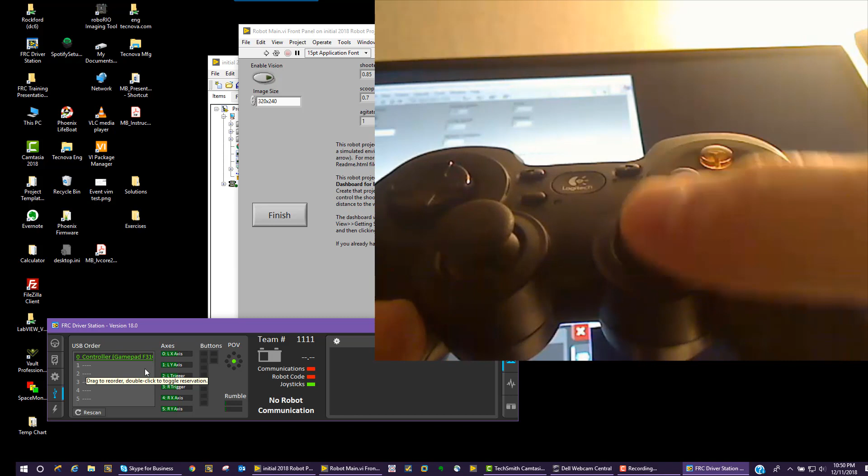And if we go over here to our USB tab, it says that I have one game controller in there, the Logitech F310, and we can move axes up and down, left and right, and we can push our buttons A, B, X, Y, our trigger buttons. We also have trigger axes, a right trigger and a left trigger.

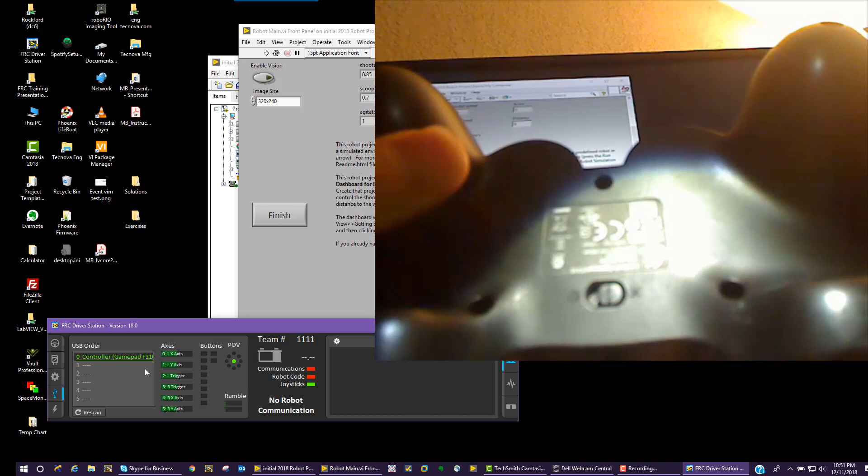One thing to note is there's a switch on the Logitech, and just make sure that I have it in the X position to get these same results. Not sure what the D position will do, but it doesn't work as well.

Another thing, the start and back buttons are also registered. And one button that a lot of people forget is that the joystick itself has a button - you can press down on the joystick, that's a button as well. The POV is this little dial here, up, down, left, right. You can also use that as a robot controller.

And the button right here is your start button or mode button, and if you push that, a little LED turns on, and what that does is swap the joystick here with the POV. Turn the mode back off, then the POV is back to this, and your joystick is back to controlling by that item.

Okay, so one thing to note is the numbers here, 0, 1, 2, 3, 4, 5. These are the indexes of the arrays when, in LabVIEW, you ask for all the axes using the joystick commands - you'll get an array, and if you want to know what axis each index is, it shows you here in the driver station.

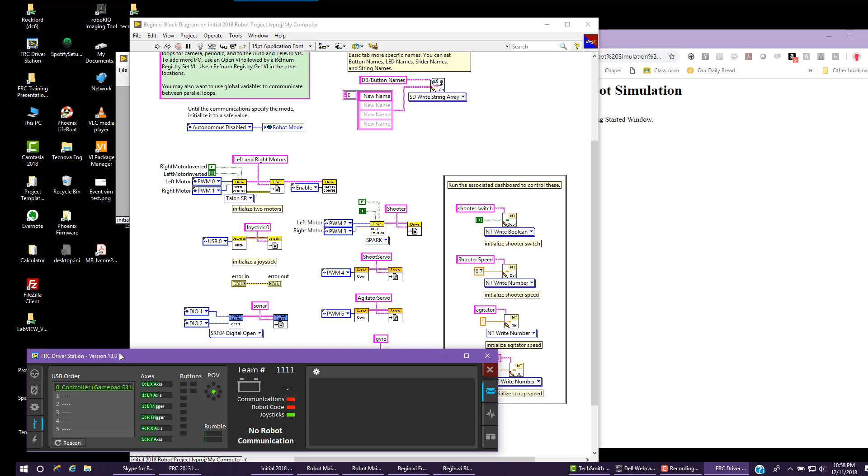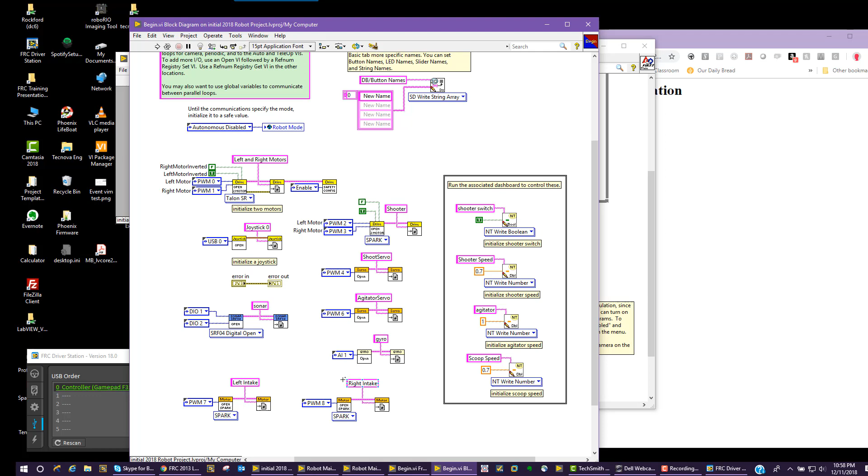So this is the begin where we're setting up our shooter, our servo, agitators, all our different mechanisms that are on this robot. We're going to look at teleop just to see what things they do in teleop. In teleop, we get the references using these VIs to read them.

This is where we get all our joystick values, and then this is the array of all our axes. If we want to get axis 0 and axis 1, when you use this index array, always - if you don't put values here, which you really should, but if you don't, it starts at 0, 1, 2, 3. So if we go to axis 0 and axis 1, axis 0 represents the X value in an arcade drive, and axis 1 represents the Y value.

If we go back to our FRC driver station, axis 0 will be controlling the X-axis of our arcade drive, and axis 1 will control the Y-axis of our arcade drive.

Similarly here, we are pulling out this Boolean array. These are all our buttons, and since we didn't wire this, this is going to be button 0. Button 0 will take the shooter servo, and when you press it, the shooter servo will go to 0, and when it's false, the shooter servo goes to 85 degrees. And that button, you can see here is the first button.

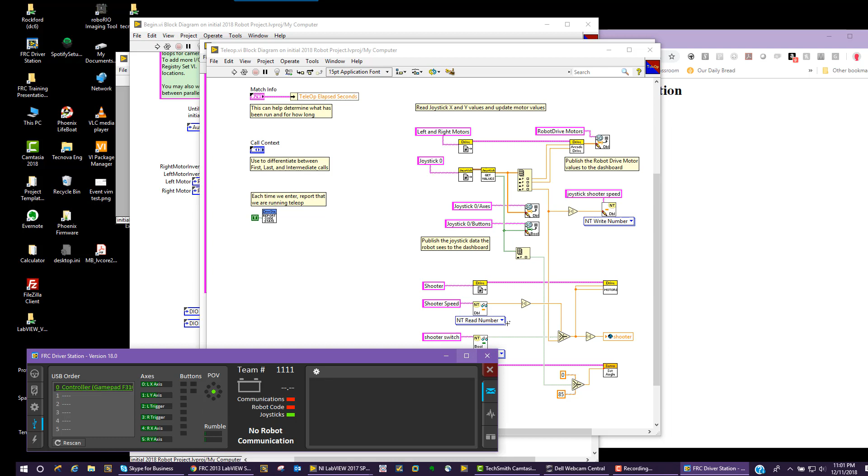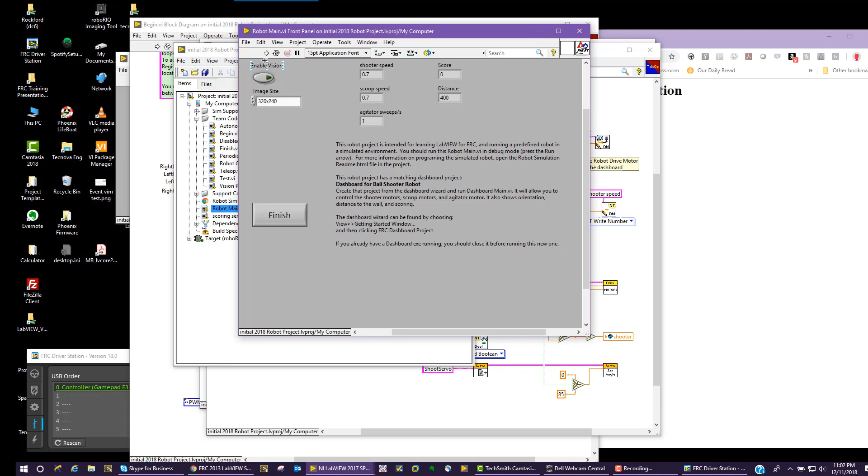Alright, so let's see if that works. We're going to go back to our main. I'm going to hit Control Shift E to go to the project, and I'm going to open Robot Main, and I'm going to run Robot Main. And there's my simulator, and I have to go to my driver station and enable my robot. And I'm going to drive it.

Set it right there, and I'm going to shoot a ball. Boom. Alright, now if I pull down the right trigger, see how far that shot? Pulling down the right trigger should speed up my ball shooter and shoot again. See if that doesn't shoot farther. Looks like it has a little more energy, maybe. Not too much farther.

So let's debug this. I'm going to come back to Teleop and put a probe here. You see, there's a probe, and as I pull my right trigger, nothing happens. On my left trigger, nothing happens. So let's put a probe here. Now if I pull my right trigger, I get change. Slide these over. So somewhere there's this shooter switch.

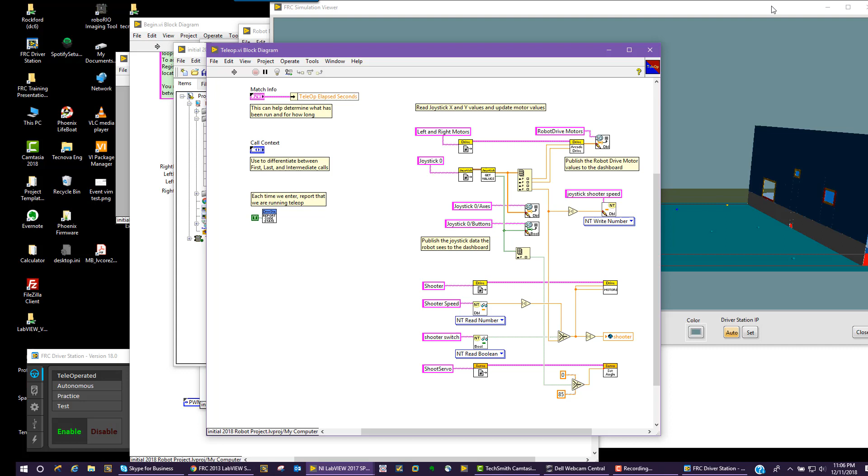So let's see how we can shut shooter switch off. I'm going to have to stop the program, and we're going to go back to robot main. Okay, we're going to continue looking here at Teleop, and bring our code in.

We saw that there's this network table that's looking at shooter switch. So I'm going to highlight shooter switch and copy it with Control C. Then I'm going to bring up my searcher with Control F, and paste it with Control V.

I'm going to tell LabVIEW I want to find all instances, but I'll go to more options here and tell it only block diagram and labels. I don't want it to look for this in the front panel — saves a little bit of time. And I'm going to click find.

I'm going to skip any VIs that are password protected. You'll see that LabVIEW found it 3 places where this shooter switch exists. So in order to toggle through all these, it tells me if I just hit Control G to go forward, or Control Shift G to go backwards. So I'm going to hit Control G.

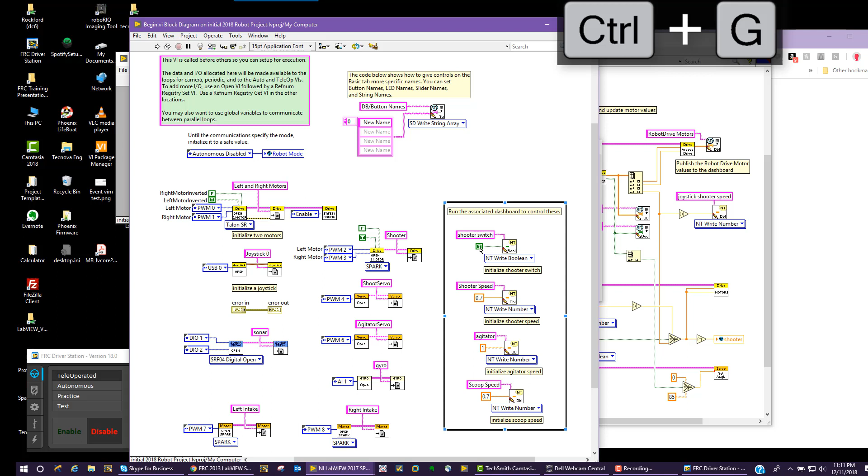You see it says shooter switch, but that's just a label. Right above it, I hit Control G again — this is where it's initialized and it is set to true. So if I set this to false, when I get to Teleop here, this value will be false, so it will use this value to set the shooter, which is my speed control, the right trigger. I'll hit Control G again just to make sure I found all of them and understand what shooter switch is used for.

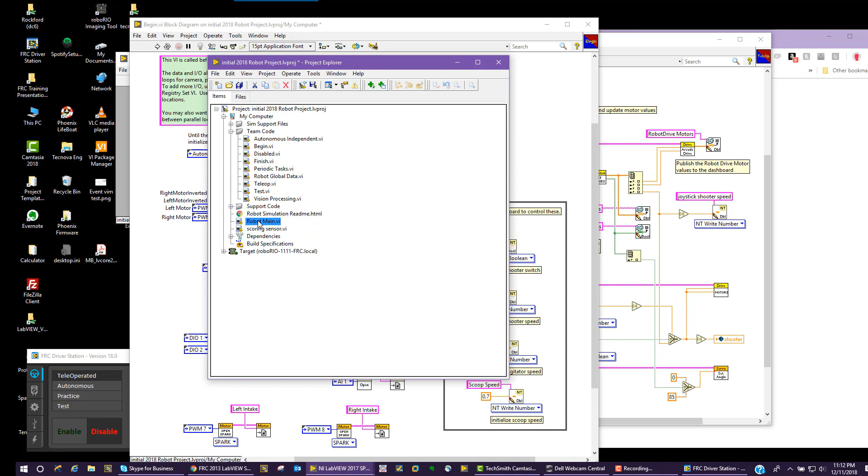Okay, so I'm going to bring up robot main again. If I don't know where it is and can't find it, I know I can find it from the project, so I'll hit Control Shift E to show me where this VI is in the project, and robot main is right down here. Open robot main, make sure driver station is open, and run.

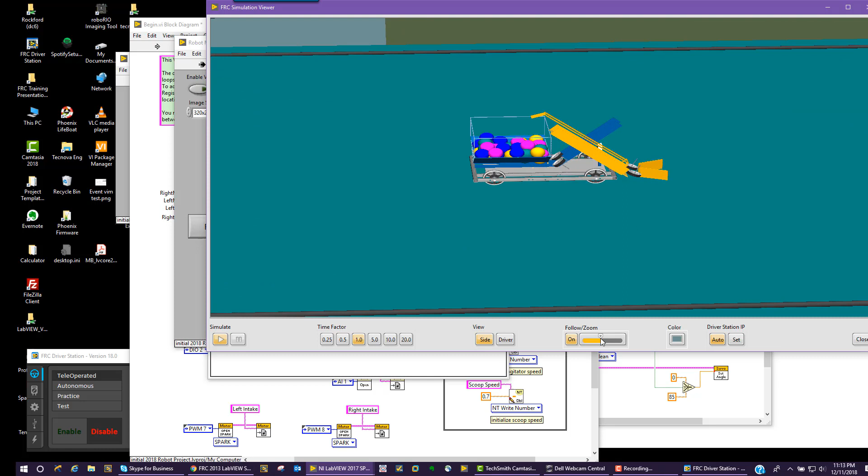Opens up our simulator again, make some more space so it's easier to see, and we'll zoom in a little bit and see. We'll go back to our driver station and enable, and we see that maybe our wheels aren't spinning.

Maybe zoom in a little better. These are our ball shooter wheels. I'm going to pull the right trigger, and you see they are spinning. I'm going to release the trigger, and it looks like it's...

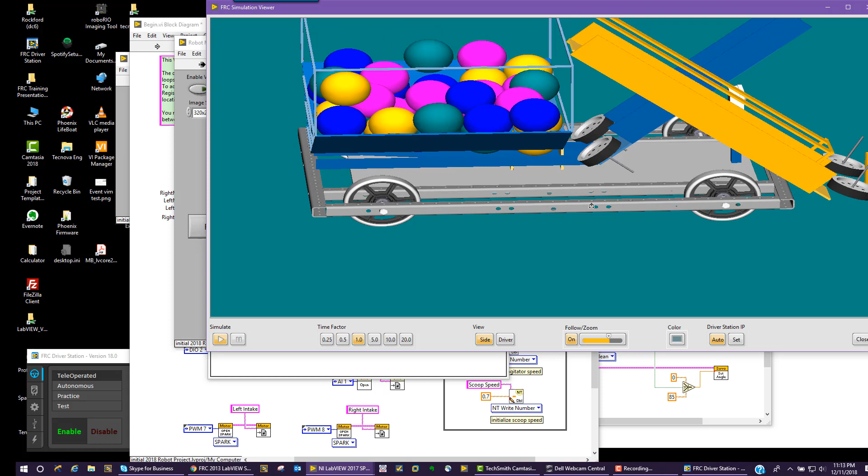So with no ball spinning, I'm going to try and eject the ball, and it should not shoot. Yeah, it got stuck. Then I'm going to spin the wheels — oh, and it looks like it's spinning them backwards. Eject the ball — it looks like it throws them right back into it.

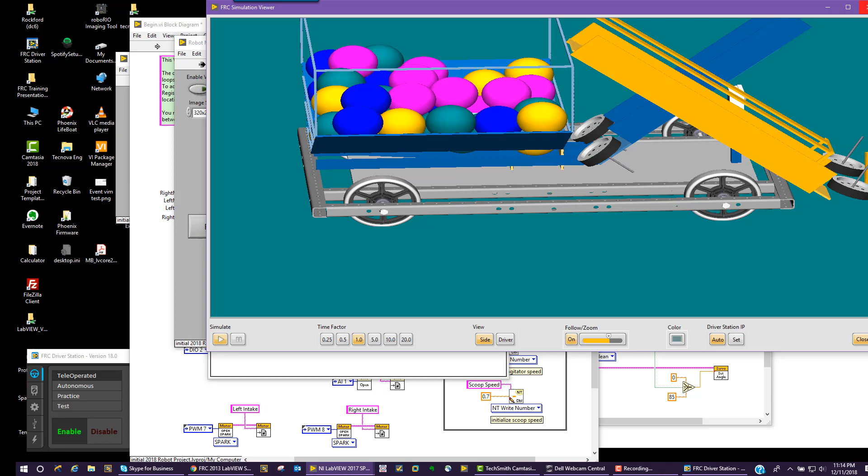So we need to reverse those wheels. We're going to stop the simulator and go back to teleop. You'll see here, if you were using the shooter speed variable, you would negate this. So maybe we also need to negate it here, or take this negation away. I'm going to insert from the numeric palette and negate the value here as well.

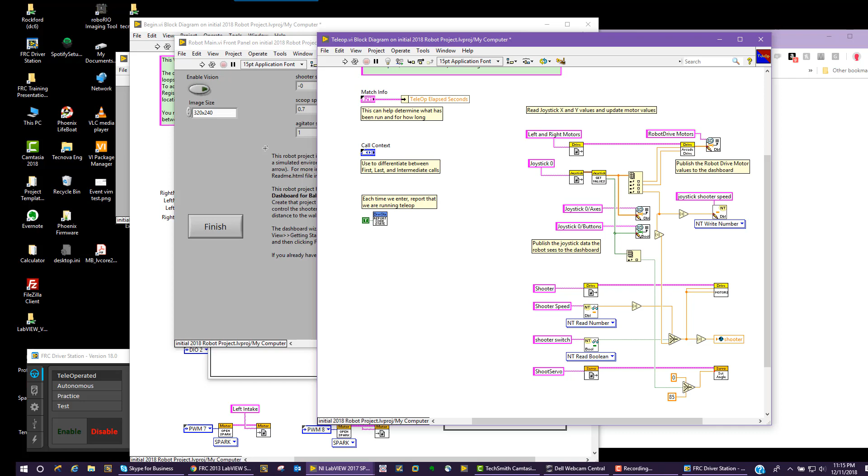And I'm going to try it again — run robot main, have the simulator come up, enable the robot. The wheels are turning — maybe the wheels are turning in the same direction now. Wheels on full blast, and eject the ball, and it's shot. Okay, looks like that fixed it.

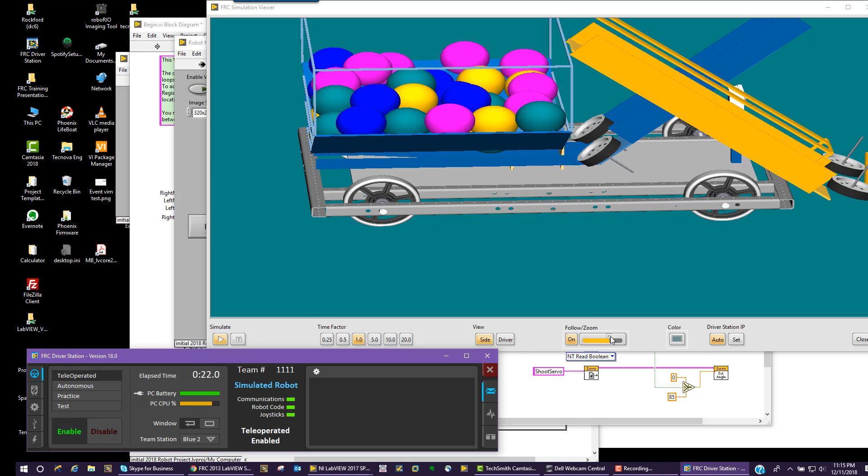I'm going to zoom out here. Alright, so I'm going to bring the driver station up so you can see what level I'm using my trigger at. Right now my trigger is at 0, and I'm going to try and set it about half speed and then shoot another ball. That went pretty far, hit the blue wall about halfway. So I'm going to go full speed and throw another ball.

Okay, that's it for now. That's how you get a starting project with a ball shooting simulator and do a little code work. And we will see you in the next video.